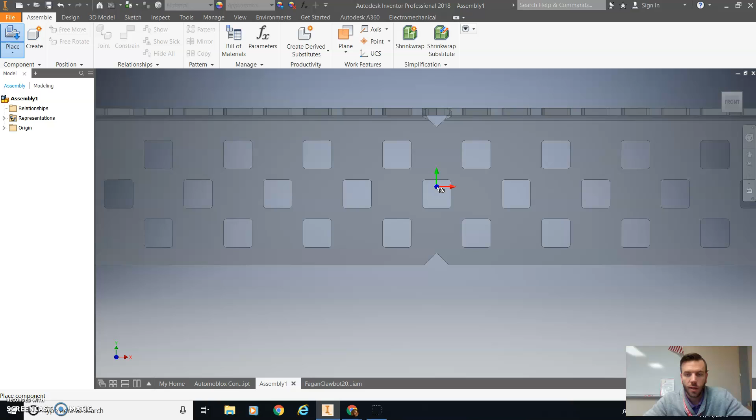Alright, click Open, and I can go ahead and just left-click to drop that, then right-click and say OK because I'm done placing parts. Now let's place the other parts we need for the basic structure, which are the 16-hole chassis rails.

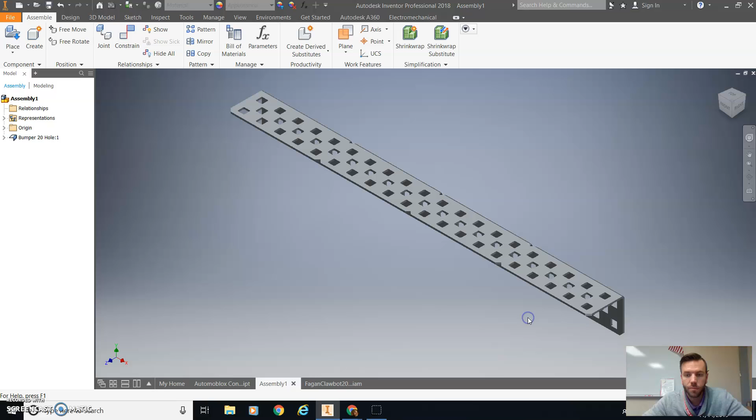I'm going to need 4 of those. Let's do Open. And before I drop this, let's orient it so that it's going to connect the way we want it to. What I can do is right-click, and it gives me the choice of rotating around the X, the Y, or the Z axes.

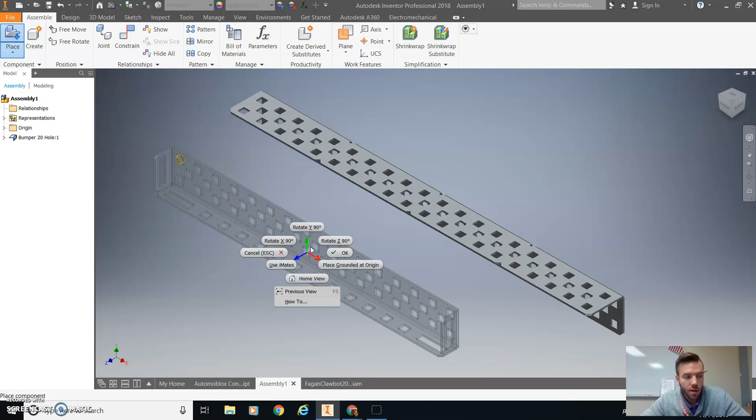It's kind of hard for me to see. Oh, actually, I can look in the left corner and see a Y, Z, X axis kind of marker. So I know I definitely want to rotate it once around the Y axis. Alright, that's good.

And then I actually need to flip this thing over, because that bar part is supposed to be up towards the top. So that's going to be rotating it twice around what is now the Z-axis, it looks like. Let's try that - once, good, and twice. Alright, so I'm going to left-click to drop it there.

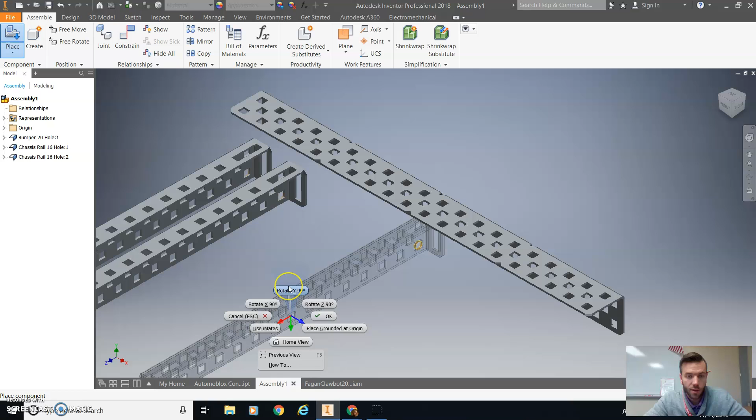I'll drop one more because we need pairs here. And then before I drop these on the other side, let's swing it around because they need to be facing the other ones. So again, we're going to rotate around the Y-axis, this time twice. Alright, got one - I'm going to left-click to drop it, another left-click to drop it, and then right-click, click OK because I'm done with those.

So now I have these, and it's a matter of constraining them. I do not have my mouse right now, I've got the trackpad. Let's see if I can rotate the way I like - unfortunately, I cannot. Let's see here.

What if I do this? No, that doesn't do it either. Well, that's going to make this particularly difficult. But if you have a Shift key and a mouse wheel, you would click that mouse wheel, and it allows you to get slightly different views. You can also do it with the free rotate - I just am used to doing it with the mouse wheel, so we'll see what I can do here. But I know I need to constrain these pieces to this bumper rail.

Alright, so I'm going to right-click before I do anything else and ground this. Grounded means now it cannot move even if I grab it and try to move it around. See, these other ones can. We need this to be grounded. That's something I'll be grading for. Once that's grounded, everything else, when fully constrained, shouldn't move either because the constraints are proper.

So let's start constraining one of these pieces to that bumper. We want the default, which is a mate constraint, and solution would be mate. I want to put the top of this, so hover until I get that arrow. I want it to go to the underside of this thing.

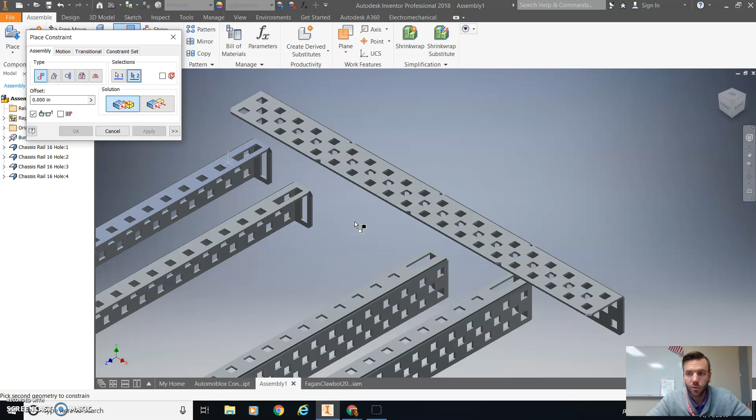I don't have my Shift and mouse wheel right now, so it'll be a little tougher for me to get, but what I can do is click here, and I can see the underside there. Wish I could zoom in a little bit. Maybe if I try this. Let's see, nope, that's the other way. There we go. That's the arrow I want. Left click - you heard the click noise. Click apply. Good, I got the first constraint I want.

Now I need to do another mate constraint to get that front to connect to here and not actually go through the object. So it's on the same setting, mate, and I will click this arrow here. I think it just did another constraint.

Kind of confused here. Let me undo that, Control Z. Apply. Let's see what I did here. This might be a good learning opportunity. What have I done? I've actually already done 2 mate constraints somehow. So let's delete this second one. I'm going to cancel out of this, come over here, and delete that constraint because that's going to mess things up. I'm not ready for another constraint yet.

So yeah, you can see you can still move it, only 1 constraint. Let's try this again. Constrain, and this time, yep, mate - I want to constrain the front of this thing to the back of this. So I'll click this side. That's one thing that I want constrained.

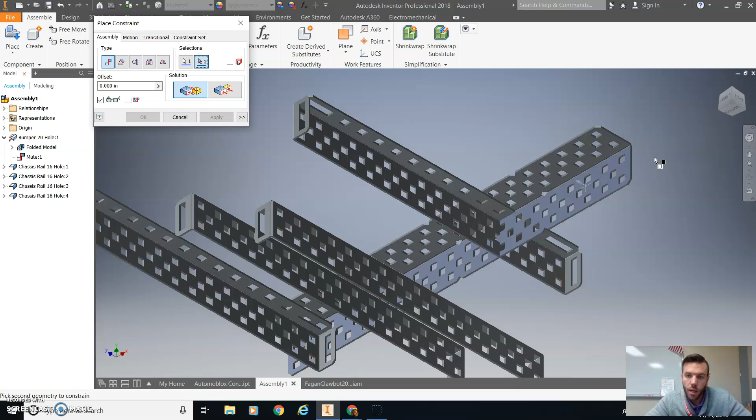Let me spin around, let me try this view. And I want this right here to constrain to it. So let me zoom in a little bit. All right, there we go. It's constrained, so click apply. Now it's lost some degrees of freedom. You can see it'll only slide now along the face of this.

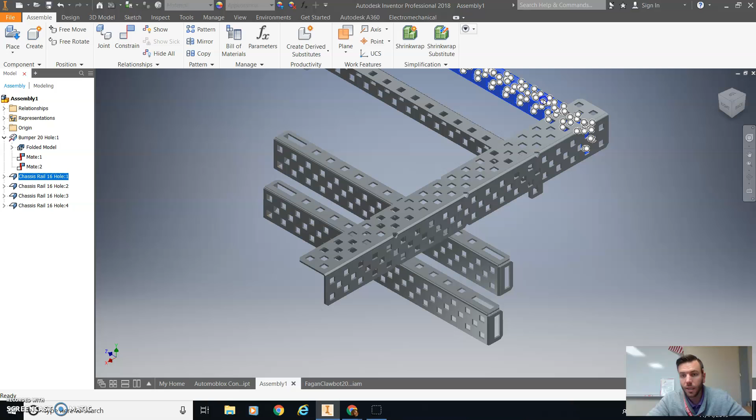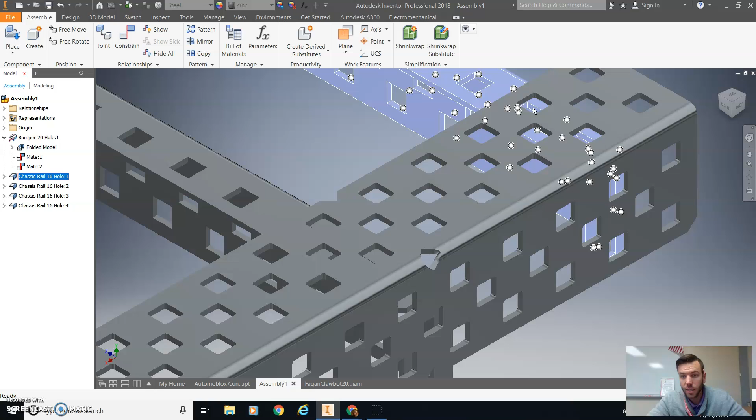I'm almost done constraining this and almost done with this video because you'll be doing these tasks for the rest of these bars. But the final thing to get this fully constrained is to apply a flush constraint. Let's zoom in a little more. Trying to zoom in. There we go. I'm going to grab this, and basically I want the edge of that hole right there. It's hard to see, but I want that to be flush with the edge of this hole right here.

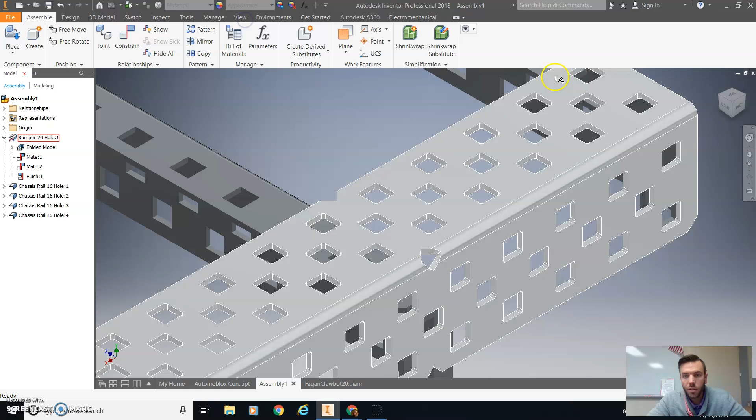So let's go constrain. It's on the mate, we want flush, and I want this right here - just had it - to be flush with that there. Click apply, and this is fully constrained. And you are done with that first piece. Let me swing around, go to the home view. See, it cannot move even when I try to grab it because this has been grounded and this is now fully constrained to it. It's exactly how we want it.

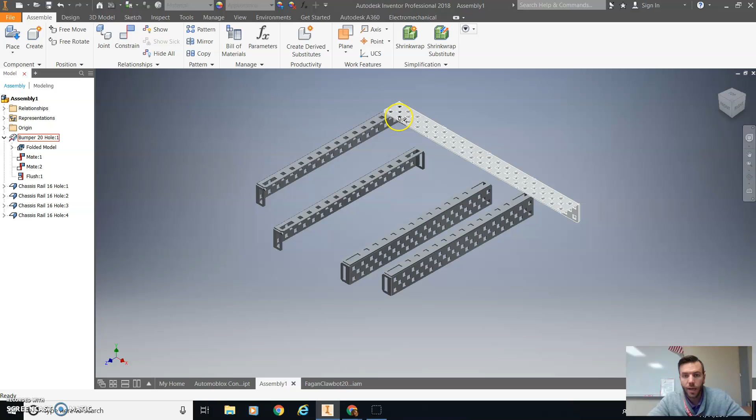Do that with these other few bars, but be careful to where they should go. You'll want to look at your own Clawbot or the manual, but it should be the next hole over for that lineup, and then same thing on the opposite side.